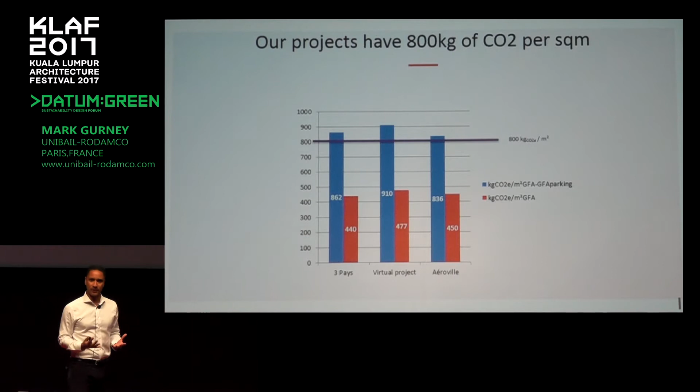Of the 100% of carbon that's used for a building, only 10% is from the construction. So 10% of the carbon that comes out of our building is from construction, 30% is from the use of the building, and 60% is from the way people drive and arrive at the building. So if only 10% of the carbon is coming from the way we build it, that puts a lot less pressure on the need for us to use carbon neutral materials in the building, because it only affects 10%.

The real big driver is the way people get to the building. So if we can reduce the travel and the way people arrive at our buildings, we'll have a dramatic decrease in the amount of carbon they use. Which means our future buildings are going to be in locations where we have public transport, places people can walk to, and places with less and less car traffic. That will be the biggest driver for reducing the carbon output of our buildings.

The second big driver is during the operation. We talked earlier about lighting and how we can save on operation costs, but the real way we reduce our operation costs is the energy that we buy from the energy providers. So if the energy from the energy providers goes down and becomes green, we'll automatically save 30% of our carbon.

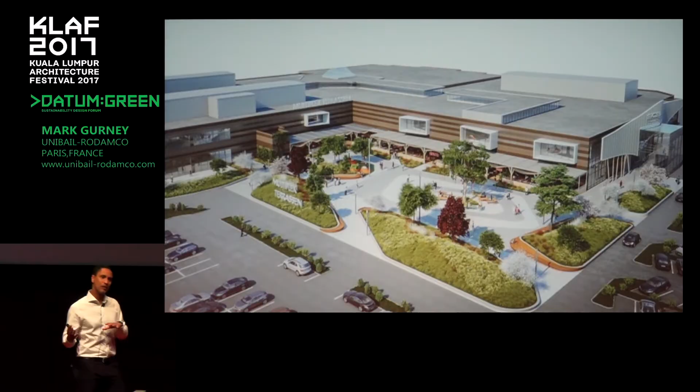We have a lot of out-of-town shopping centers which we're trying to fix. This one is in Vienna. There's a seating area of restaurants outside next to the car park. We're trying to reduce the amount of car parking because fewer and fewer people are coming by car, and we're providing stronger public transport. So we're doing a lot of refurbishments, turning places which were car parks into places which are now more convenient for eating and restaurants, which makes people want to stay longer, with less driving, reducing our carbon.

In Paris, where my headquarters are, this is the Champs-Élysées. I guess some of you have been to Paris. It's the great axis leading from the Arc de Triomphe, in this direction, all the way down through to the CBD district with all the towers. My company has a building here, the Palais des Congrès, a conference facility like this one, one of the biggest in France. In front of it is a large roundabout, which is killing this axis and is a real nightmare of traffic.

So we went to the city and said, look, we want to reduce this roundabout if we can—it's the city's roundabout. Here's what we're proposing: the roundabout becomes a main central road. We get rid of the roundabout, which continues the axis. The Bois de Boulogne, a very big park in Paris, we're going to extend into here, where the roundabout was.

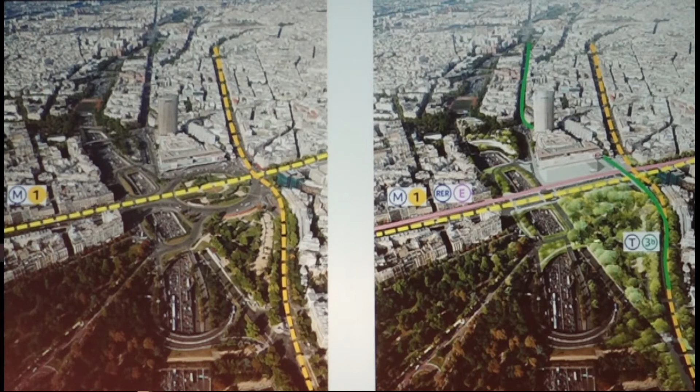And of course, we want to extend our building here to increase the amount of real estate we have. So we went to the city saying, look, we're pushing for this—we will build it, you give us the ability to build more real estate, and we'll do it. We're working with Christian de Portzamparc, an architect in Paris, extending this edge of the building with an extra piece, which strengthens this axis from the Arc de Triomphe, where before it was a roundabout, brings the park in, and gives us the opportunity to do more building.

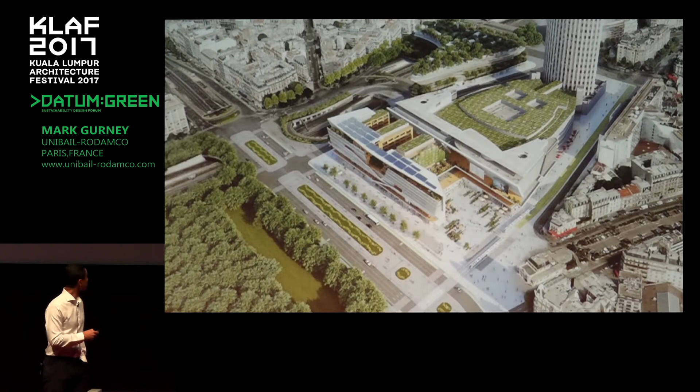This is the extension of the building on the edge—this was the old facade. On top of that, we want to open up a space in front of the building to create a plaza, which is a new entrance to our festival hall and to a complex of offices, hotel, and shopping mall. This is the new main axis which is strengthened through here.

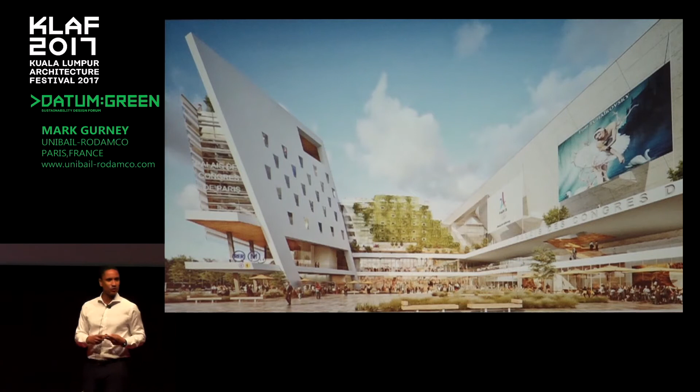So by creating an urban space in a place which was originally a roundabout, we're replacing cars and a roundabout with an urban place for people. We have two metro lines meeting at this point, so we have a lot of public transport. Together with the city of Paris, who has a long-term vision that the amount of cars will reduce, we're pushing for a reduction in cars and replacement with open public space. This also counts towards our strategy of reducing our carbon.

In Hamburg, does everyone know where Hamburg is? Hamburg is in the north of Germany, a very wealthy city, a port city. Part of the city has a plan to refurbish and redevelop a big part of its southern edge, which is all reclaimed land.

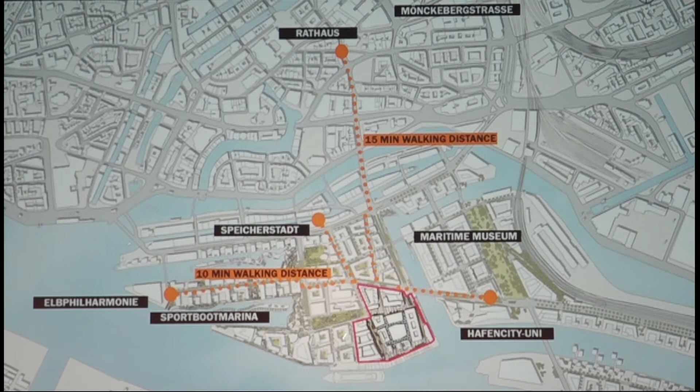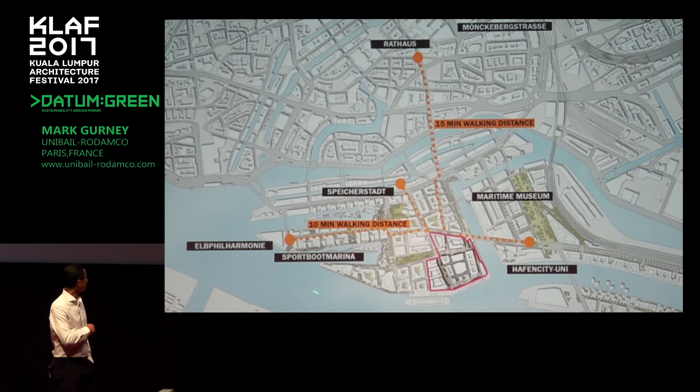This is a large multi-use, multifunctional project with several buildings. I don't know if we have any developers here, but if you're a developer, the edge of the plot next to the waterfront is always a difficult thing to do. For an architect, it's fun because you have water in front of it, and there's a lot you can do.

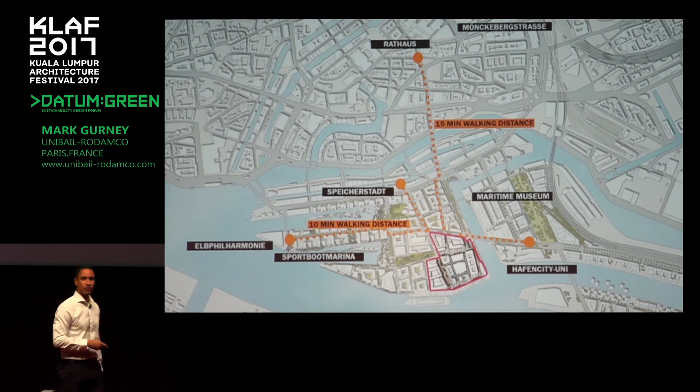But for a developer, it's very difficult, because it means all of your customers need to come from this side, from the north. You can't catch any customers from the south. So you're basically building a project next to a natural boundary, the water, and you've cut off half of your catchment. It's a very difficult project to work from a development point of view.

So this is the plot, which sits here. This is the existing building, and all of that is the plot of land. The Herzog and de Meuron new opera hall, which you might have seen in magazines, is here, and it's just been opened. We're trying to think of how to create a series of buildings that will work within our new strategy of 50% less carbon output.

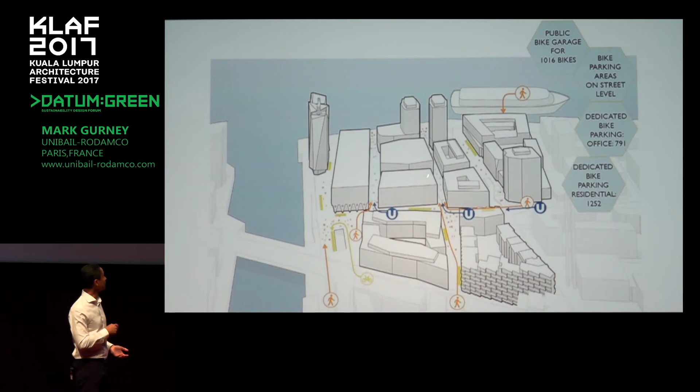So our big thing is to try and say, okay, we're not going to have much car traffic here. How do we get people into this project from all the different non-carbon using mechanisms: metro, bus, bicycle, walking? The whole design of the series of buildings has been planned around where people will be entering from those areas, those ways of moving in.

The frontage next to the water uses different architects. We've got Christian de Portzamparc, who's designing a hotel and a tower, and we've got UN Studio, who are doing two of the office towers. So we've got a whole series of architects who've come in and designed different buildings.

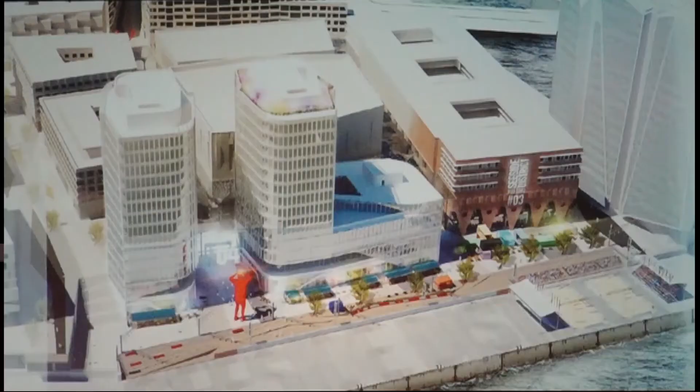But the real trick to this project is how to create all the spaces which work between the buildings. That's where we decided to get an art curator, someone responsible for creating the glue between the buildings. Because we think if we can create a series of spaces between the buildings with a certain cultural quality, we'll attract people more into this area.

What we're trying to do is attract people in and keep them there. So you live there, you work there, you shop there, you eat there. Everything happens in this area, so you don't need to drive in or drive out. You find everything. So we've got an art curator coming in and saying, okay, this is the location where we're going to have artwork.

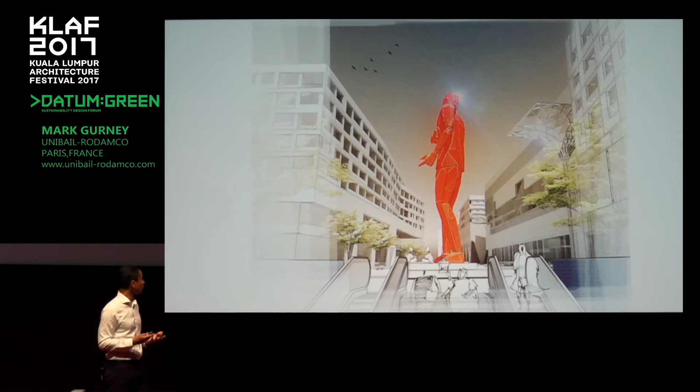We're using artwork and graphics and elements of the buildings to create the character of this district, separate from the buildings which are coming down to the ground. So you'll have a memory of the place through all the different artwork, and somehow that's going to lock you in more, and you're going to stay more.

All the streets which are shopping, actually it's a shopping mall, but it's been designed like open streets. It's not going to be air conditioned, so it's going to be naturally open. We're going to have a roof, but it's going to be naturally open, so it's going to have the feeling of a street, but it's more or less a shopping mall.

So we're going to reduce our operational costs in terms of heating and cooling. We're hoping, and it's a big risk for a developer because we invest a lot of money in these projects, that the customer will be as comfortable in this environment as in an air-conditioned or heated shopping mall, which is difficult because we all like to go to air-conditioned heated spaces. But by having a very strong architecture, a very strong glue and cultural element to this project, we think people will actually feel better here than in an air-conditioned or heated shopping mall.

Even the way we're doing the roof, this glass roof in the mall, we're allowing the columns of the glass roof to come down in the mall—which shopping mall operators hate having. But we felt, to make it feel more authentic, like you're really in a building which works, we kept the columns of the roof structure coming down in the mall. Our feeling is the columns will be placed where people can stick up little pictures, like 'my cat is lost,' to make it somewhere people start to inhabit, feel, and take as their own, and not have the desire to leave.

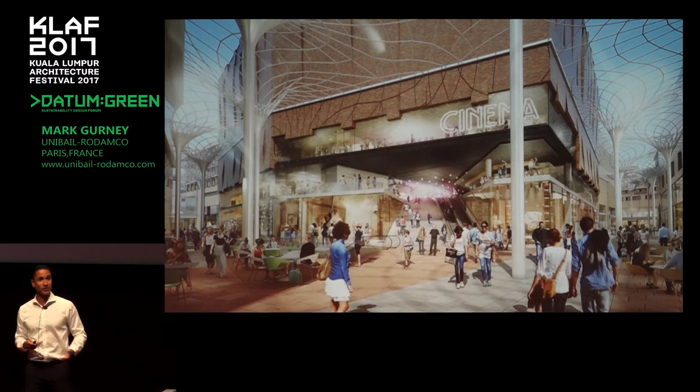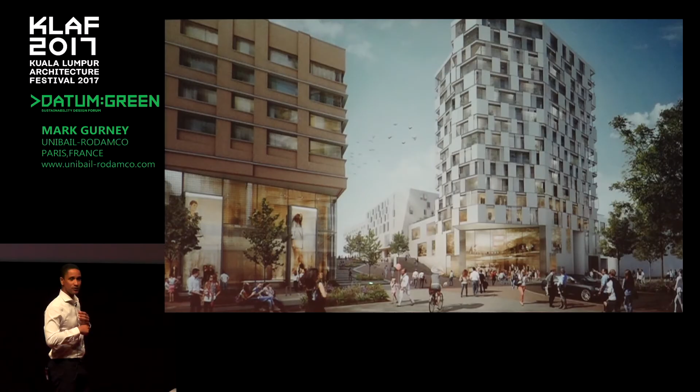We're playing also with this project with different levels. We have different buildings and the entrances happen in different areas. This is an entrance into a department store, but there's a road which rises up for cars and drop-off to a hotel district, so you enter in but can also walk underneath. There's a mixture of indoor and outdoor spaces working together, so we get a mix of indoor-outdoor spaces to improve the quality of the place.

Another mixed-use project we're doing is in Brussels, next to the Heysel Stadium—which any Liverpool supporter will know infamously for a very tragic event that happened there. We have the land around the project, and we're doing a mixed-use development of shopping mall, office tower, and residential. When you come out of the metro, which is very important, we give our customers a variety of opportunity for different experiences.

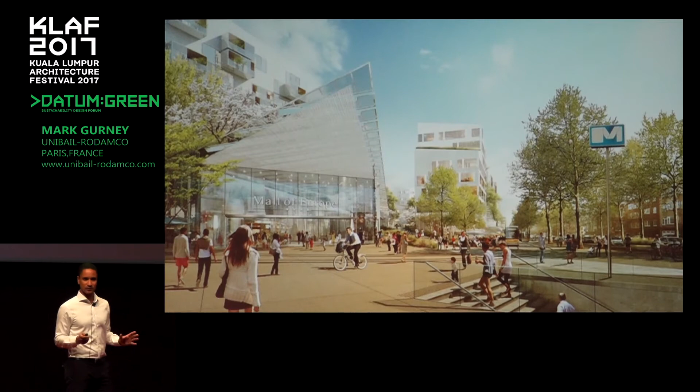They'll come in and can enter directly into the shopping mall, or walk up and above to a garden on top of the shopping mall which gives them access to all the residential towers, or they can stay along the street and enter into a series of shops and restaurants. So the shopping mall is a classic shopping mall which can work very well with nice double-height shop fronts and views up into the garden.

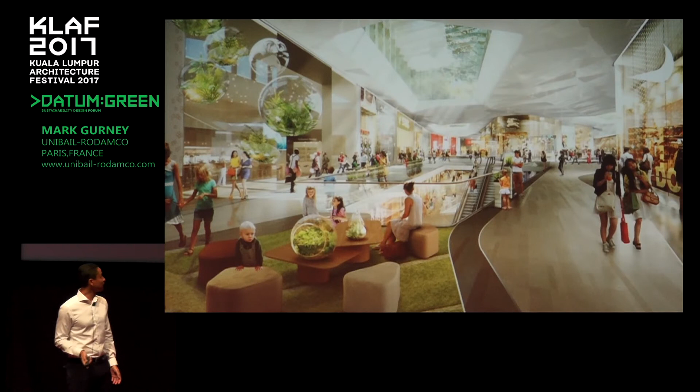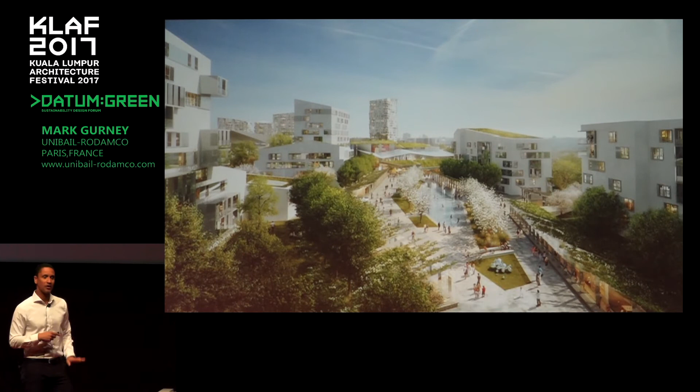Walking up to the garden on top, you can actually go from the garden down into the shopping mall, and from the garden you can enter directly into your residential houses. So the garden's also a destination within this. Along the street, it opens up to parks which open onto the street with restaurants along the edge. So we're trying to create destinations.

I think we talked, in the last slide, about how to create the city of love. We're trying to think how we do that with this variety of destinations—some indoor, some outdoor, some on the roof.

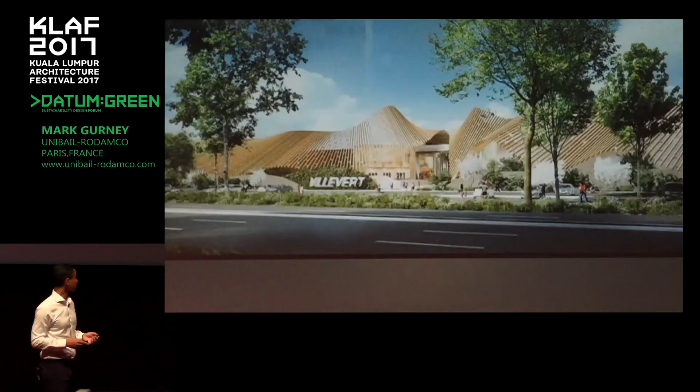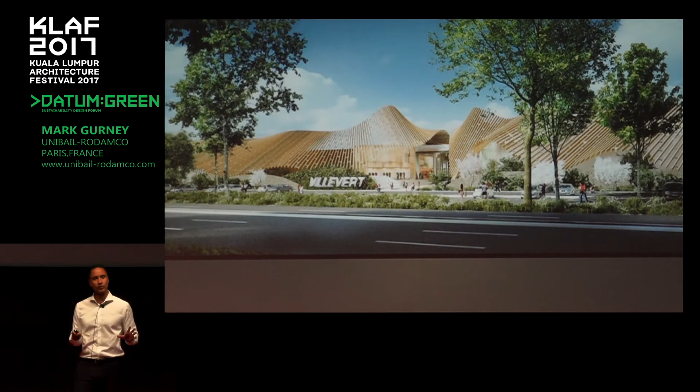Another project I wanted to show is that we're trying to gauge how much customers are willing to accept materials which look reusable or more eco-friendly. One challenge of being a developer is that when you sell your project, people often look at the specifications. I've seen specifications normally in Malaysia for residential houses—they're very clear that the toilets are marble, the taps are gold. So people want to see the materials.

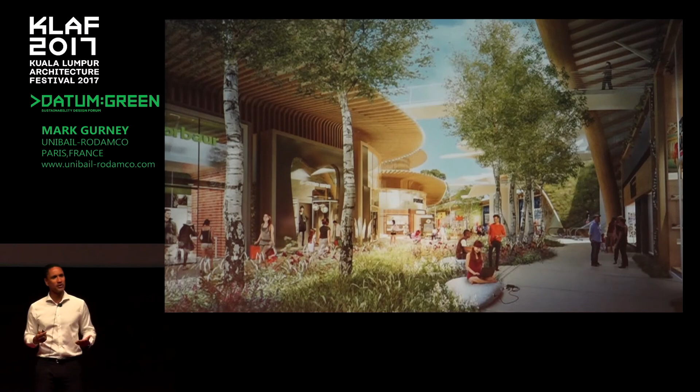We want to sell these projects on the market for very high prices too, and we have people asking what material it is. If we start selling projects which look like this, not traditional high-quality projects—a lot of landscaping that looks kind of rural and rustic, a lot of wood in the materials—sometimes this isn't perceived well in the investor or resale market. People say, what kind of material is it, why am I paying all this money for materials like this? So we're gauging a little bit, hoping the trend and customer taste is changing, so it'll allow us to use these materials and argue that this is still a high-value destination, even though the materials might not be what you expect.

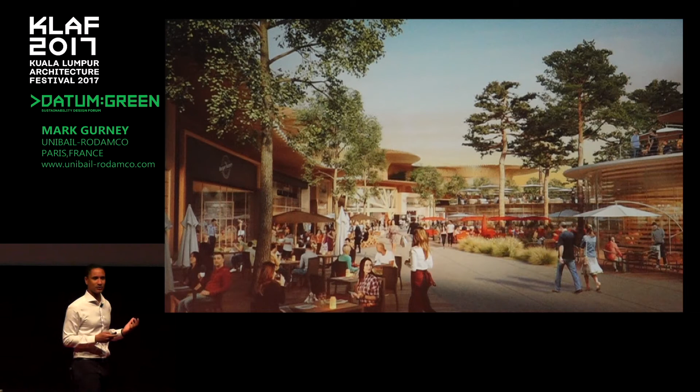It's driven a lot by the younger generation, the desire more and more to find places and destinations which feel more honest, more real. This is a modern food court outside of Paris that we're trying to develop, which is nothing like a typical food court—it's all outdoors, and Paris is pretty cold in winter and pretty hot in summer. But we're willing to risk that an outdoor food environment which looks natural will work actually better than an indoor one.

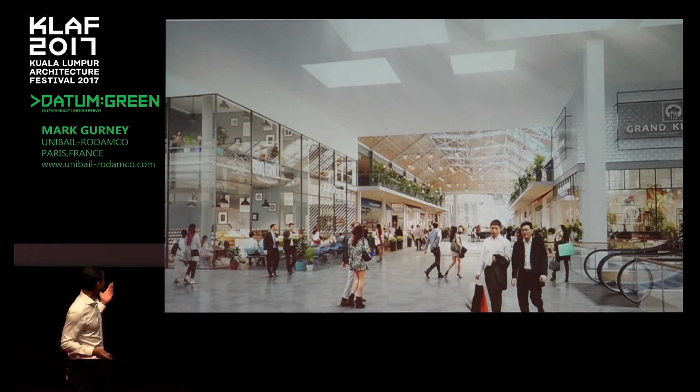So somehow changing customer taste is giving us the ability to reduce our carbon footprint. Even in some of our indoor malls, this is an indoor mall, you know, this is a food court.

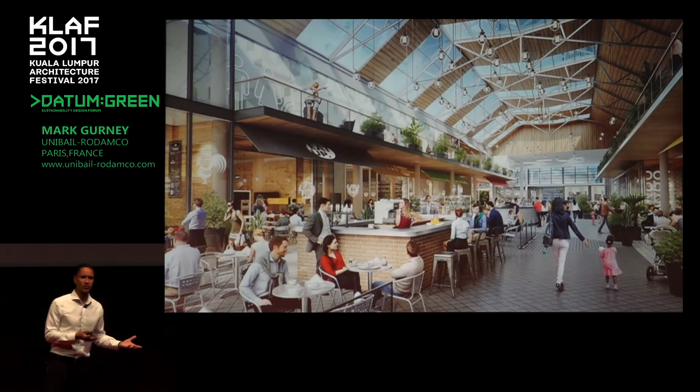And it's a direction we're going in which I'm a little bit concerned about, but I realize why: this is a completely new building, but we've designed it to look like it's an old shed, an old barn. Because this is more and more popular, we're finding, with people—people like to use places which have a history, which have been reused. And we're going down a little bit of a dangerous track. It's something I think we need to change, in that we don't have enough old buildings to occupy, so we're building new buildings which look like old buildings which can be reused.

But as a way, the principle is nice—the feeling is more rustic, it's more honest in the materials, it's lighter, it's not so heavy. We're avoiding the use of gypsum board, which is very carbon intensive, using reusable materials instead. It's more and more popular, this kind of look, which is quite encouraging.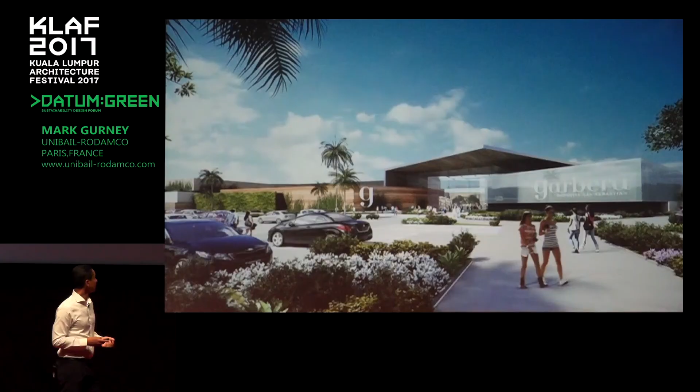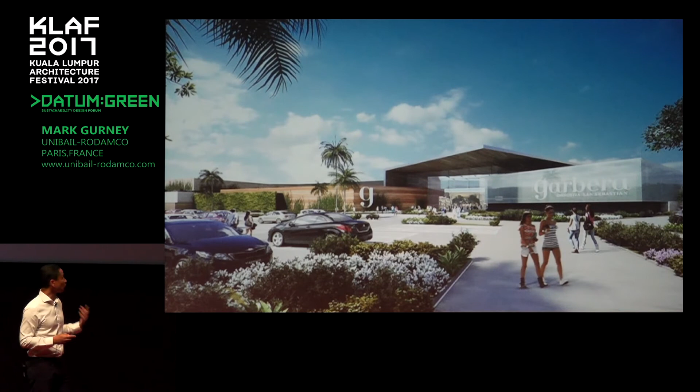Even the briefing that I'm giving to architects now is more like: I think the architectural style we're trying to find is something that tries to make the building look as lightweight as you possibly can. Make it look like you're using as little material as possible, because we think somehow the new aesthetic coming with this drive for more green efficiency is going to be lighter—a lot more wood, a lot more natural materials, ceilings which look like they're floating. We're seeing that more and more as being something which is popular with our younger customers.

And even on the interiors, trying to bring reusable materials, trying to bring green into the building so it feels fresher.

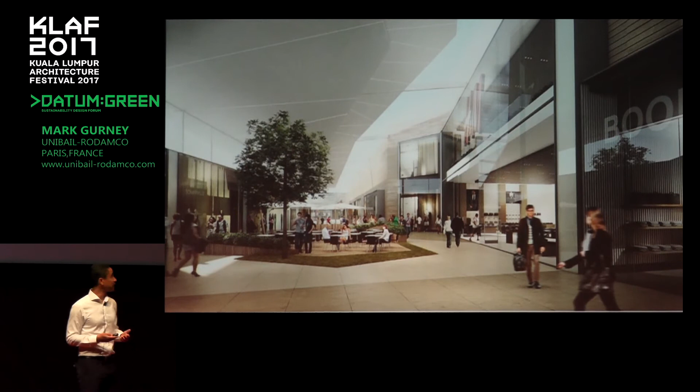Our feeling is that our objective of reducing our carbon output also has an objective of our customers feeling like they're healthier. So you need to feel healthy, and there's no way better to feel healthy than when you enter into a space which feels natural and healthy. So natural light, natural materials—we think that makes our customers feel healthy, which we think is also part of the objective of making our overall products feel more carbon neutral.

This is a project we're doing in Basel, a city in Switzerland which sits on the border between France and Germany—so you have three countries meeting at one point. And we're trying to create a project, a shopping mall just outside of Basel, trying to attract customers from Switzerland, Germany, and France. So it has to be quite a destination. And we're looking and trying to work out what type of building now people want to go to.

And it doesn't really look like a building—it's a building in a park. Really, we're thinking more that people don't necessarily want to go to a building; they want to go more to a park. So how can we make the experiences you have in a park come more into the building?

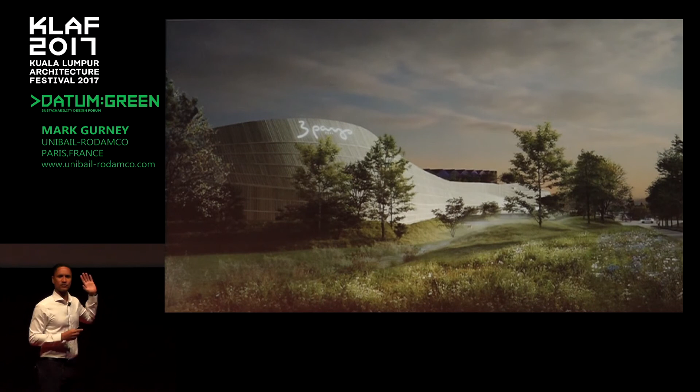So we're working with Richard Rogers on this one. The facades of the building—we still haven't worked out what facade to do. This building facade is wood. We're thinking of using wood, kind of a curvy facade out of wood, which I like very much. Our concern is that wood can look good, but it can age very badly, and also when it rains, the wood stains and changes color. We're concerned about that—I'm unable to convince my company yet to use wood in the facade. If any of you guys have any ideas to help me with that, I'd be very happy, because I think wood in the facade would be very interesting for a commercial building.

And we're looking at also glass. Now, glass is very carbon heavy, but maybe there's ways we can recycle glass. In this part of the world, in Basel, which is near to Alsace, the big wine-producing part of France, I was thinking: could we somehow use all the glass from recycled wine bottles? Are we able to use that glass in the facade? So we're looking at that now with the architects to see if glass would actually be less carbon, more carbon neutral than the wood, because it's recycled glass in the facade.

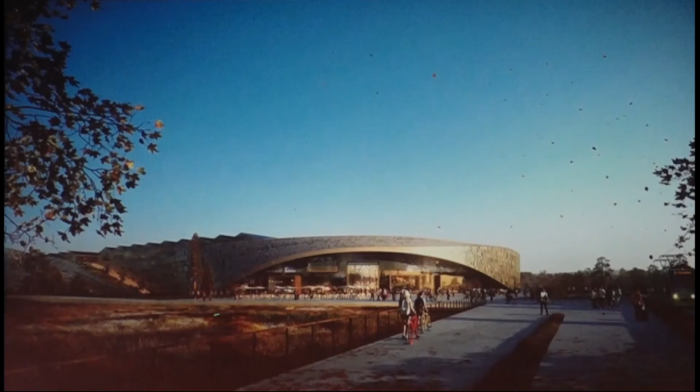I know the facade has all the strong entrances that you need for a shopping mall. But on top of that, from the side, you can also walk up onto the roof. So we're trying to make our buildings now more livable in different areas.

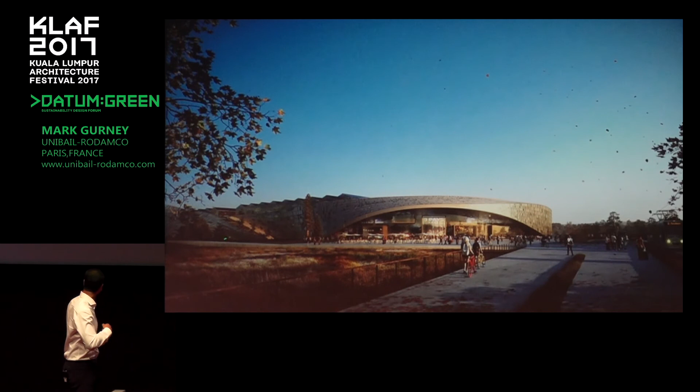You have entrances, like in the last project in Brussels. You can enter into an enclosed world, or you can go up onto the roof where you have a series of restaurants, or you can go around the side of the building, where you find restaurants overlooking an area with a small agricultural plot. So food which is prepared, which is grown here, gets taken into the restaurant to be eaten.

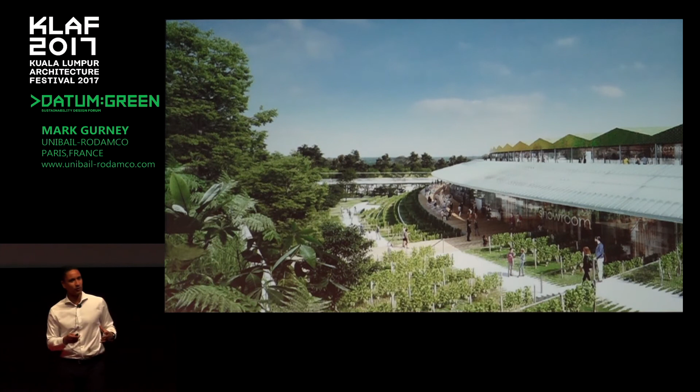People want to feel that more natural, more organic, so we try to make that happen more with our food courts in our shopping malls. And then this garden is part of the whole experience of visiting the center. So it's not just about going to the center, but it's a whole day of recreation with garden, building, and food.

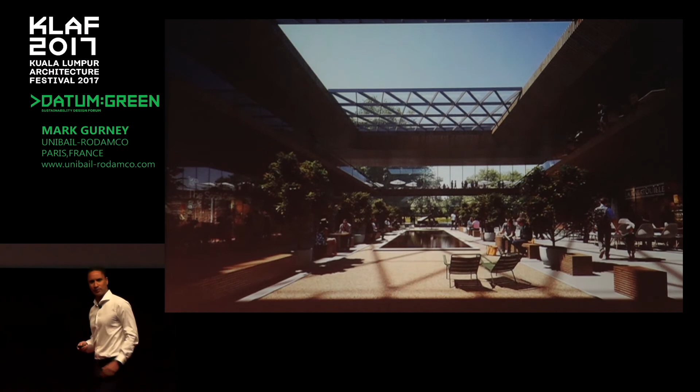Even on the inside, where this is a food court, you can see the materials we're using is, again, wood, recycled. Also a roof which can open and close, so that in the summer you can open this place up and it becomes more natural and outdoors. We think this is more the future of what people are looking for, and of course it's going to reduce our operational costs.

This is a project we're doing in Prague, in Czech Republic, and it's a tricky one. I put this slide here because I thought I could maybe get some advice from some of the architects here. We did this project a few years ago with an architect called Wingårdhs from Stockholm, Sweden, a very good architect. It was a competition. It took us years and years of planning to get this far. In European cities, to get projects of this scale built is very difficult.

It's a fantastic building, and this is the entrance to the building. The design was finished, we got all the approvals and permitting to go forward, but this was done before we made the commitment to 50% reduction in carbon. So I'm not sure what to do with this project, because we like it very much and we've got all the approvals. If we go back into a very complex phase of redesign, it could hurt the chances of the project happening.

So what we've briefed Wingårdh, the architect, is to say, okay, we like the project, are we able to do this in a more carbon-neutral way? Just like the project I showed you in Bâle, we're looking at, because this is glass, can we find reconstituted glass, glass which is recycled, to put in the building? Something we're investigating. And from what I hear, I think it's possible.

I don't know if you guys have any ideas. From a point of view, it's a shopping center and office complex. From the point of view of an urban project, it's fantastic. We have the entrance here, and we have a level above where we're going to have breakout spaces, so you have people on levels above which are also overhanging the entrance. It's a very interesting project.

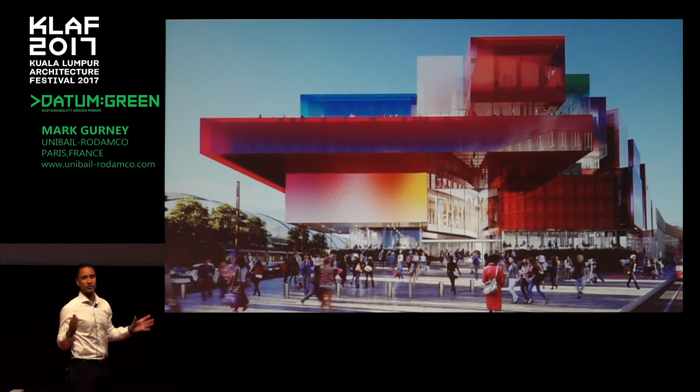And Prague is a great city of architecture, so we want to keep it. But if anyone has any good ideas on how to keep these kind of facades - because we don't just want to do wood, rustic-looking buildings. We want to still keep a modern, fresh look to our buildings, and we want to use glass. Czech Republic is one of the countries which really pioneered the creation of glass, so we're really looking at how we can use glass in a carbon-neutral way.

But then, talking with them, we said, well, that's not a very carbon-neutral way of approaching an existing building. Like I said before, if you can use your existing materials - and that's all concrete, all cement tiles - if we can use that and not tear it down, it'd be much better for us, and also for the city. They've been living with this building, with this formation, these little patterns they have here - you see it everywhere in this building. In the city, they know it, the building belongs to them, they use it. We have almost 150,000 people a day going into this place.

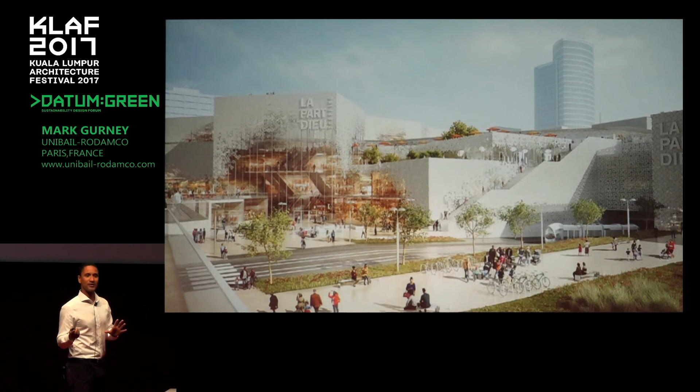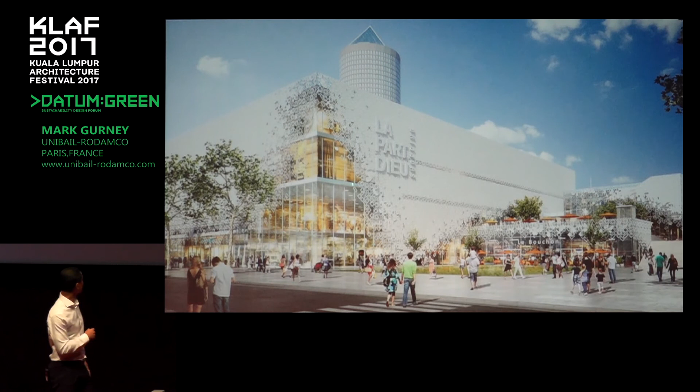We've kept it, which is good for our carbon, and it's kind of good because people remember it. All these corners and edges start to open up with this motif - this is one of the edges here, because it opens up. And even where we have food and restaurants, we break the facade up just above where the restaurants are, and it kind of breaks up on this side.

I had a big debate because I was on site a week ago, and we were debating, should we paint it white or should we paint it a darker color? Because the problem with white is it gets dirty early. But in the end, I said no, we paint it white. That's the risk you have to take when you want powerful architecture sometimes. I said it's better for a white building to become dirty than for a funny, dark, yellowy building to stay clean. Is that the correct thing? You guys are architects.

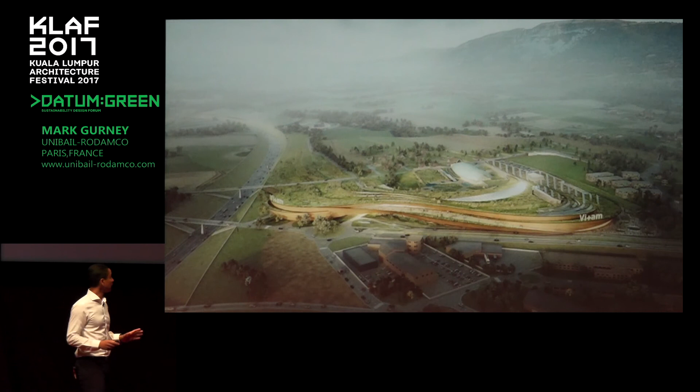This is a project outside of Geneva in Switzerland, which is a little bit crazy. The whole thing is a completely new build, and we're trying to build the whole thing out of wood, so a wooden shopping center. We're using architects from France who are specialists in wood - I'm hoping it can work. The whole roofscape is a park, which, at the very first building I showed you where we did a roof on top of a building in Frankfurt, we know how expensive it is to do a roof on a building. It's not cheap, so you better be getting some very good returns on having a green roof like that. But a whole building out of wood, you're seeing it more and more, and I think that technology is going to become stronger, and we're going to see more and more of it.

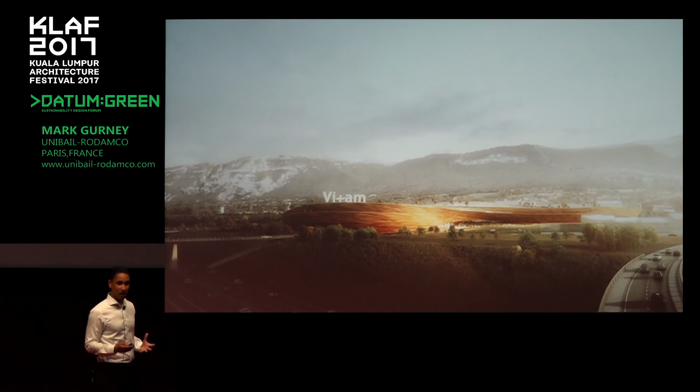Our biggest concern is what I said before - does this kind of building have a high value in the market for investors if we want to sell the project?

And the final project I'm showing you, this is a project in Geneva. It's a shopping mall with some offices and a big cultural center outside of Geneva. There's some undulations in the land, which we're trying to keep. So the land is undulating, and we're trying to see if we can build this building up and down on the land, and also carve out a little bit underneath.

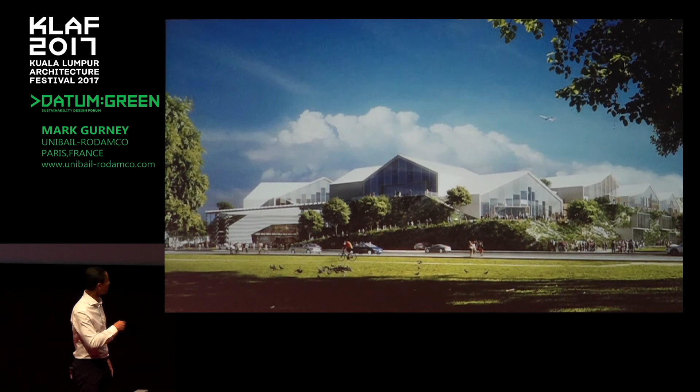So from inside, when you go in, you actually enter the project here, and behind here there's actually a shopping mall, but somehow the tops of the shopping mall pop out in these different little buildings on top. Inside each of these buildings you can have dedicated restaurants - we're trying to say to the interior design regulations for the restaurants, all the interior design has to be in reconstituted wood, so there's a kind of consistency of the interior language, but also it feels like you're in a building which is natural. Each interior could be quite a nice restaurant with views over the Alps in the distance.

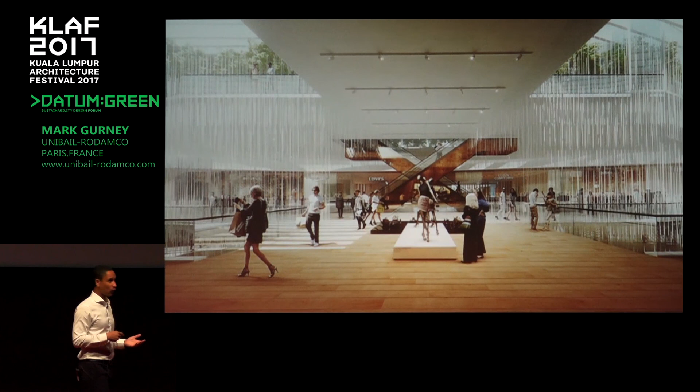And the interior of the mall, which is a classic mall, we're trying to use wood on the floors, stone where we can, wood paneling along the sides of the escalators. So the whole aesthetic of what a project looks like, especially a shopping mall, we think is going to change more and more and more.

And of course, in this part of the world, not like here, you get really bad weather. And even in winter, these buildings somehow glow, they feel nice. It feels like a nice destination to go to. Because at the end of the day, like what the previous speaker said about cities of love, if we can make our products places where people really want to go, and they'll stay there and not use their car to go somewhere else, we're going to hit the biggest part of our objective of reducing our carbon emissions.

That says finished, by the way.